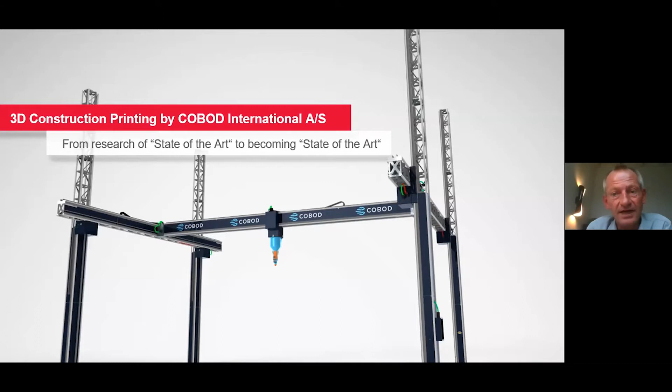Good afternoon, my name is Henrik Lund Nielsen. I am the general manager and founder of COBOD in Europe. As Ty was saying, COBOD stands for Construction Building on Demand. I'm labeling my presentation 'From Research of State-of-the-Art to Becoming State-of-the-Art,' because our start was in fact that we only did research, and right now, in all modesty, we believe that we ourselves have become state-of-the-art within 3D construction printing.

If we look at our development, we started with 3 years of research under a government grant, where together with NCC, the largest construction company, we were touring the whole world. This was a global investigation caused by the fact that the Danish government was afraid that we were falling behind as a nation within construction printing. Denmark is a little bit of a funny nation - if we are not number 1, 2, or 3 in some industry, we get nervous. So the government wanted to promote this technology, and tasked us together with this big construction company to tour the world.

We investigated all these projects, and brought home the best, brought home state-of-the-art, so to say. That took place over 3 years. During that process, we also did 2 test printers, tested 20 different recipes or materials for the printers, and visited 38 different projects. I don't think anybody in the world has ever visited that many 3D construction printing projects, and I personally visited 35 of them. So I think, in all modesty, I can say I have the broadest knowledge of what goes on in the world in this industry.

As a consequence, we had 2 conferences organized, and at that time they were the biggest, with 200 attendees just to hear about construction printing. We also issued the only report that's ever been written about construction printing - it's 108 pages. We've been asked for many copies, but sorry, it's only available in Danish, and the Danish government will not allow us to translate it, because this was information for the Danish construction sector, not for the world construction sector, so to say.

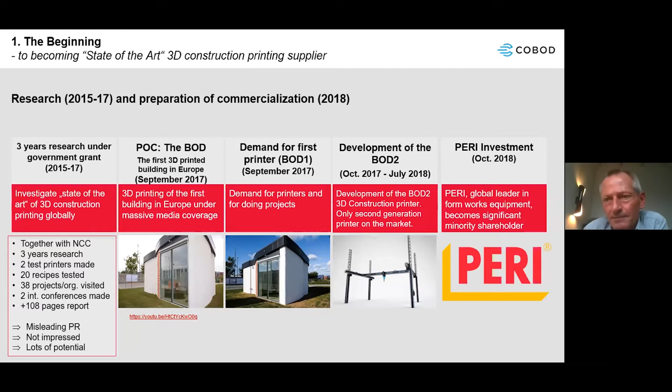So by October of 2018, they joined as a minority shareholder, and that, of course, was a huge quality stamp on our organization. So by January, we then delivered the first printer, and we delivered the next by April.

These are, in fact, 2 tenders, the only tenders that have ever been made in Europe, because in Europe, when public organizations are buying, they have to do a tender. And we won both of them.

Those were 2 educational/technical universities. Then by July, we made the biggest printer that has been made so far in the world. It is 27 meters long, 12 meters wide, and 10 meters tall.

With that, you can build printings or print buildings with a 300 square meter floor plan, as you can see down here on the lower picture, in 3 floors. So you can actually build a 900 square meter building. So forget thinking about this technology only as small buildings and so on.

In essence, we can do the building as big as you like. There's some limitations in the height and the width, but we can do them as long as you like. Let's have a look at how that printer looked like.

Notice the car down in the left-hand corner.

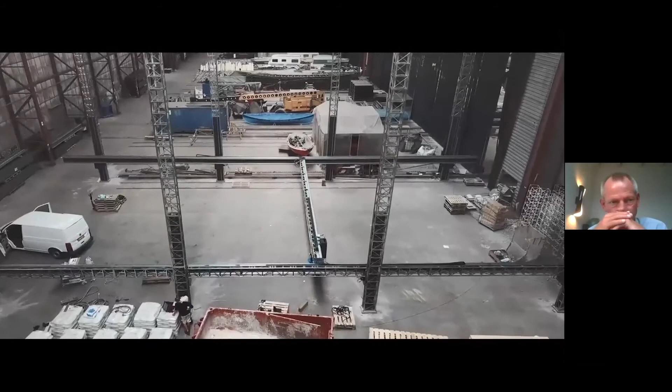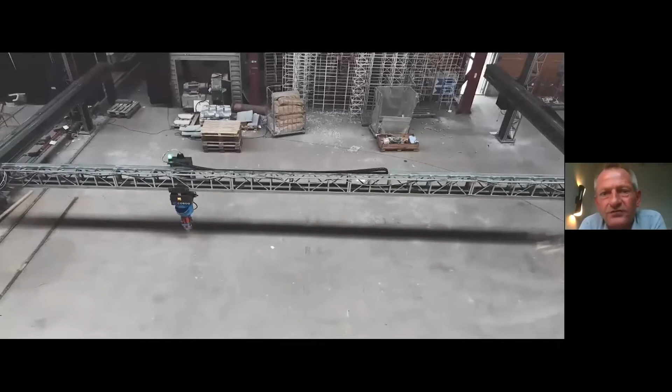So this is heavy-duty construction equipment. You are looking at hardware weighing 16 tons here. So it's not a flimsy little toy thing. This is heavy-duty construction machinery.

That was sold to Saudi Arabia. And then by August, we then won this iconic project by Emaar. Emaar is the Sheikh's real estate company in Dubai.

As you might know, the Sheikh has decided that 25% of all buildings in Dubai in 10 years from now will have to be 3D printed. So it's a hugely interesting market. And we won this project about building this villa, which is quite iconic, as you can see, very special design, very prestigious project. We have actually done it, but they are not making it public yet because of Corona.

Then with the help of PERI, we began distributing our printers in Germany, Austria, and Switzerland. And PERI is supporting us with 150 sales guys in that market.

Now I have a problem because I can't see what the next slide is saying because you guys are in the way with your, how do I move you guys away over on the right-hand side? Oh, like this, okay.

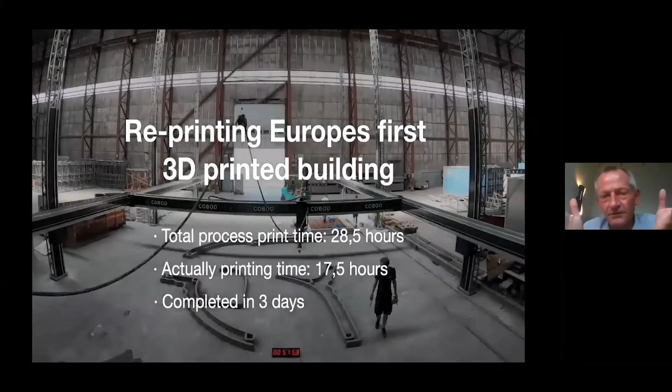And typically for us also, everything is on camera, everything is on time lapse, so you can see everything we do. You can also see when we mess up, sorry my language, because again, you can't expect to be perfect the second time. You can expect to be better, but not perfect.

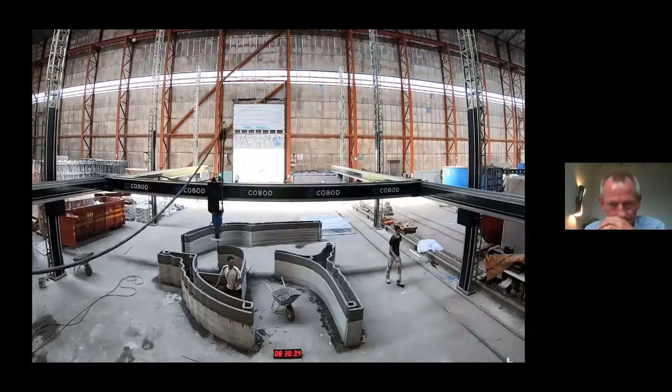And you can see there's a timer on the bottom, so you can follow how far we are coming up at what time.

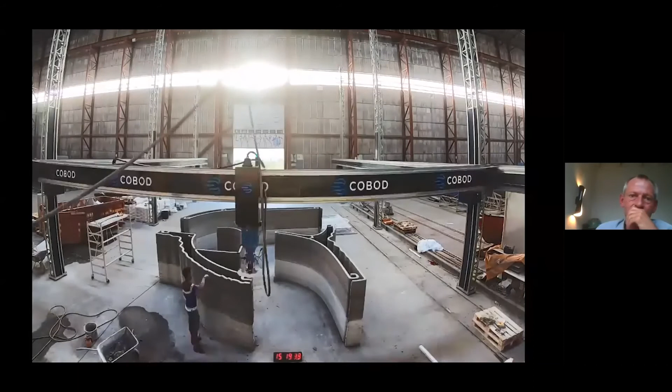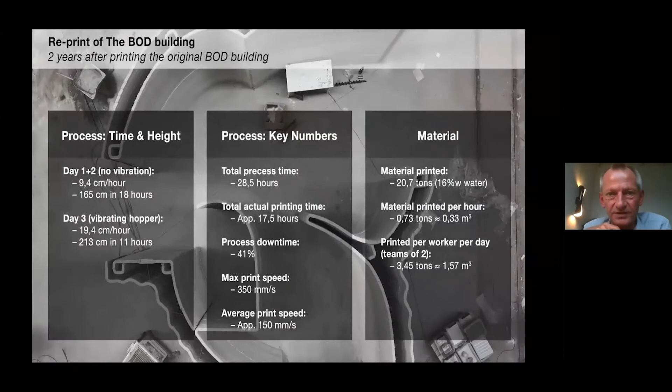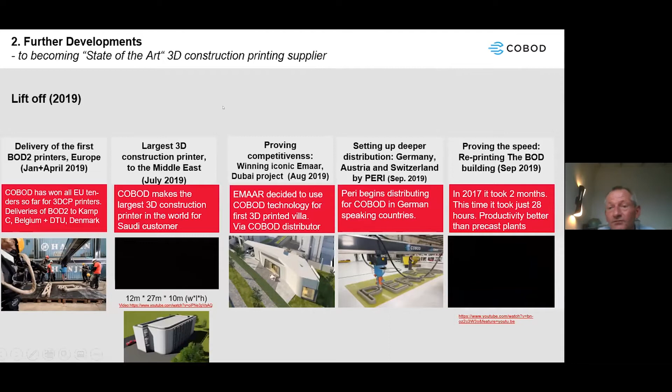And again, full documentation is supplied. We had various issues also when we did that. It didn't run perfect, but we came down to 28 hours. So we went from 2 months down to 28 hours. That's like a 30 times improvement in productivity just by doing it the second time.

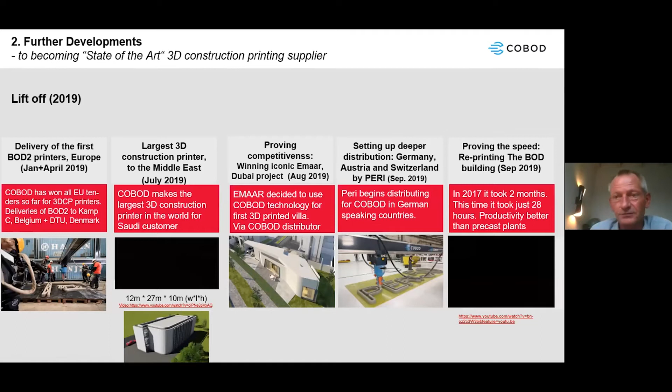So now what would happen if we did it a third time or fourth time? Because we're not a construction company, we are a robotics company. But you can imagine yourself the productivity increases that happen as you gain more and more experience. So if we had to do it today, we would expect that we could do it in 8 to 10 hours.

Then by October, we entered into a long-term cooperation with General Electric and Lafarge. I don't think, at least General Electric, they don't need further introduction other than to say that they're very, very large within windmills. And Lafarge is the world's biggest cement maker.

So these are companies with 200,000 and 100,000 employees, and then our small little company, but we just happen to have the technology that the other guys need in order to make very tall windmills. So this is the idea of that project, that we should make on-site print very tall towers.

And we started printing the first 10-meter windmill tower last year. And we will see a video of that now.

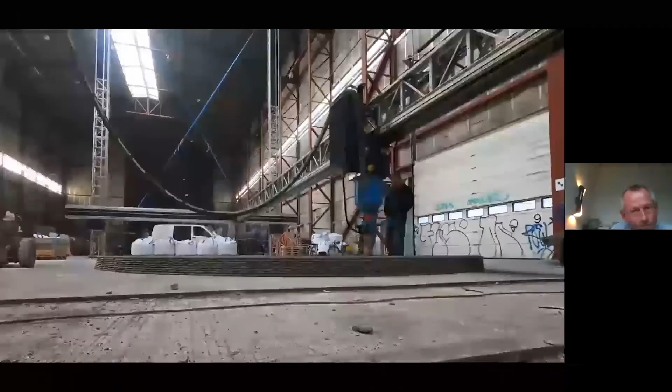Notice what happened when we come up in the height. You don't see any people at all. You just see the printer working. So where are the guys? You know, there are no guys around. Oh, sorry.

This is a long-term cooperation, so we are continuing doing lots of stuff with General Electric and Lafarge. And this customer, the educational institution in Belgium that we supplied a printer to, actually used it in November, but they first published it now, to print a 2-story building, the first 2-story building in Europe.

Let's see how that looks.

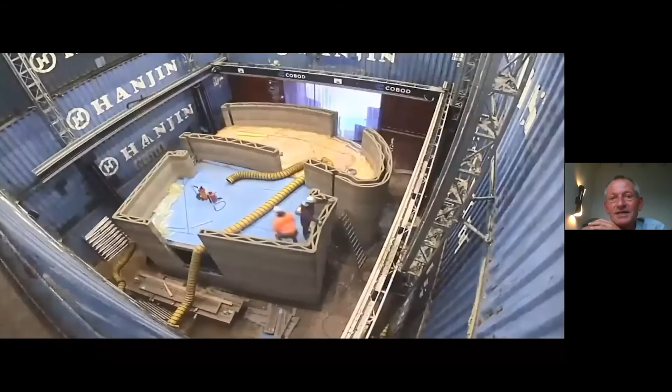This video has been downloaded 350,000 times, a testament to the extreme popularity that the technology has right now. They did one good thing: they left the printer even after they finished the building, so everybody could see that it was done on site.

Very nice trick. Then by December, we had a visitor from Japan, and they were talking about a project they hadn't mentioned before in our previous discussion. So we said, you seem to have a project, do you have some drawings? And they said, yeah, we have drawings. So I said, can you send them to us during the meeting, right? So they sent it during the meeting.

3.5 hours after, we were standing in the warehouse looking at the first meter of their building, as you can see on these pictures here. You can also notice the huge improvement in the smoothness of the wall quality that we have made. That just shows you the extreme fast conversion from digital files to physical product that is possible with this technology.

Then we started selling in the US, and we've had the first 2 printers shipped out to the US, respectively to Florida and Texas. Very well chosen—when you look at where COVID is hurting the US, it's exactly those 2 states it's worst. So we haven't been able to go there ourselves yet, but the printers are there.

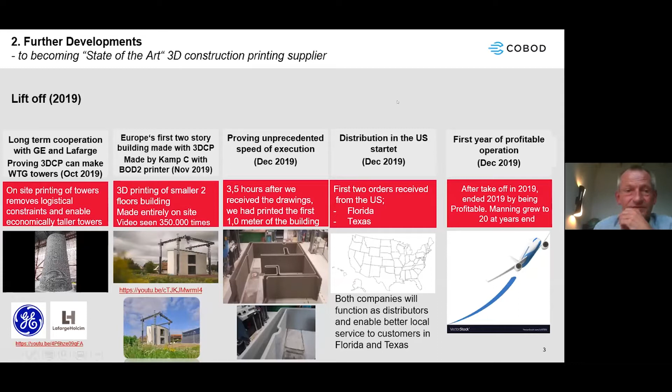And very unusual for a startup, we actually turned profitable already in the 2nd year of our operation, in 2019, which is quite an undertaking.

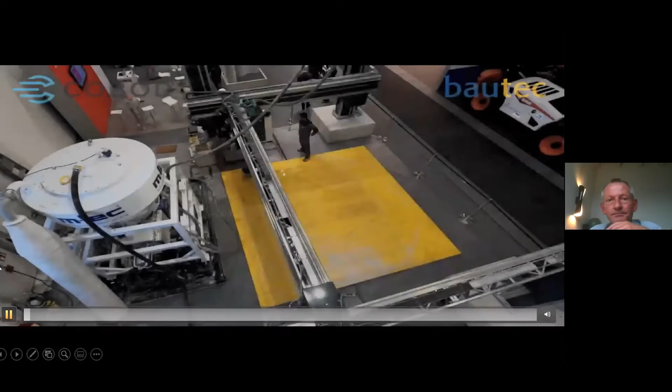Again, to prove more how much we had improved, we showed up at an exhibition live, and we said we're going to print a small house every day in Germany. And so we did that. It's a very small house, but it still proves a point.

Notice how many visitors are there looking all the time. So there's no fake here, there's no fake video editing. People are seeing live what we're doing.

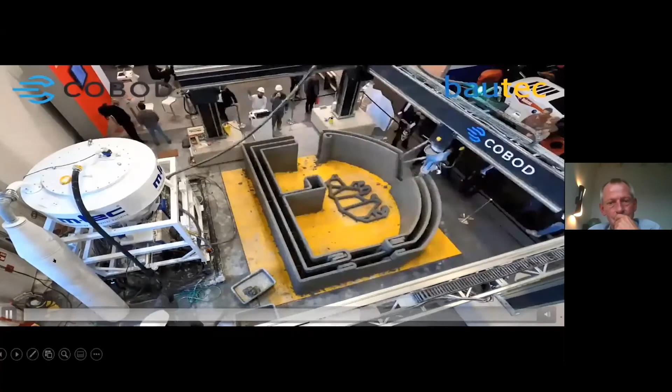This is the logo of the exhibition that we are printing in the middle. They wanted to have that logo in concrete, so we printed that for them.

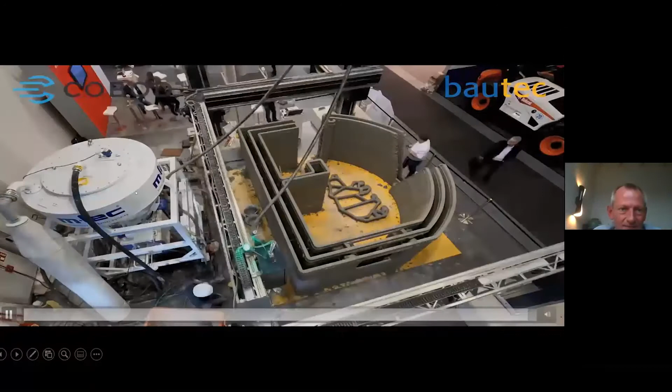But more interesting maybe is a more detailed shot, because these time lapses don't show that many details, but we can see some details here.

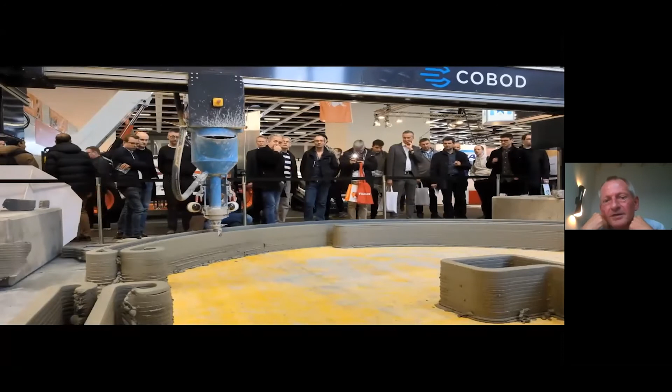Again, you notice when we use the flaps, the walls become very, very straight and smooth. We can't use the flaps on the lowest layers, but we can use them as soon as we come up in the height.

This is again very much different than our competitors because this is real life. You can't hide anything.

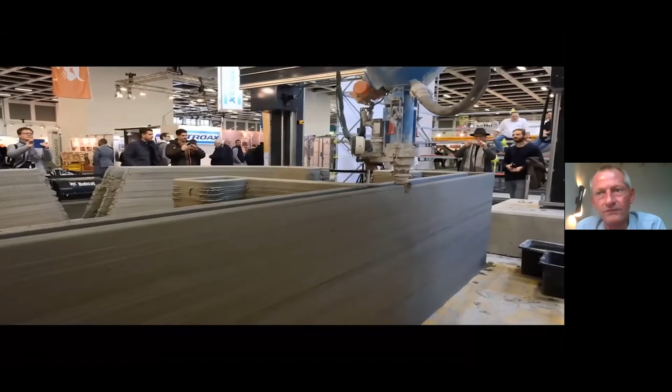So we were obviously the talk of the show because nobody had done this before, printing 3.5 houses in 4 days. Then we actually also started selling printers to Africa, which was new to us.

And we've also now started selling into precast plants, which is new to us. Normally we have been focused on on-site application, but now we've actually sold into the first precast plant. And in total this year, we are growing 75%, which, if you think about Corona and so on, is not bad.

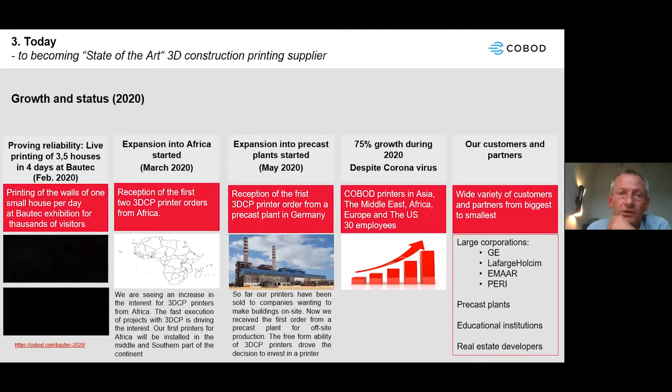Today our customers count 4 different groups: large corporations like we heard—GE, LafargeHolcim, EMAAR, PERI, these are big companies; the precast plants, as I spoke about; educational institutions; and then real estate developers. We have a big amount of real estate developers that want to move into this technology and sort of shortcut some of the construction companies.

Just a few words about our printer. It's modular, so you can build it in any direction that you like with these modules of 2.5 meters, meaning you can do the size that you want. There are some limitations: it's 10 meters in height right now and 15 meters in width, but in the length you can go as long as you like.

So we can just see a few more details about the printer here.

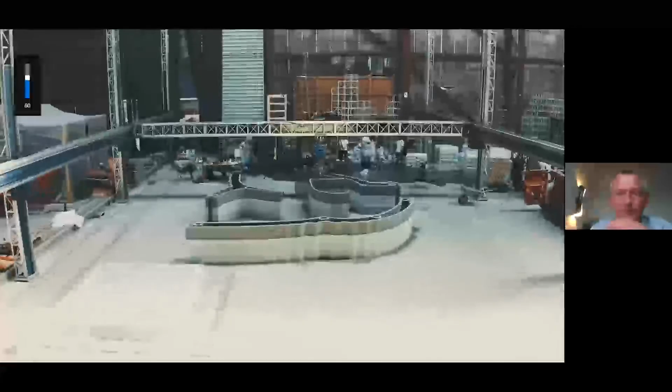I think I still have 3 minutes, right?

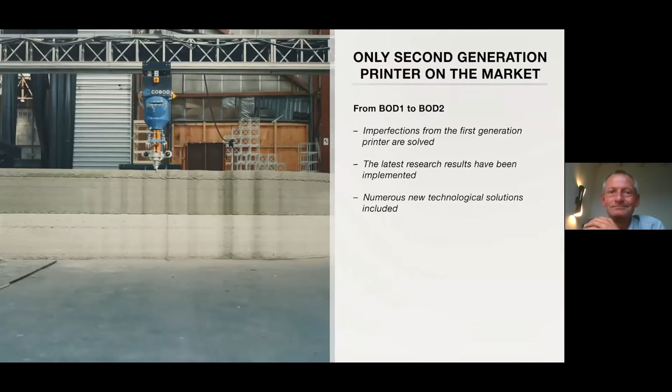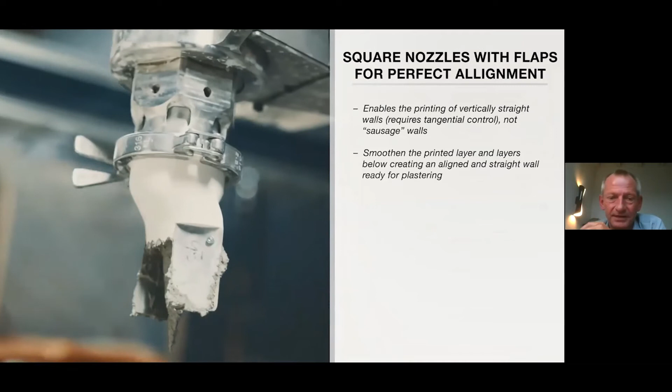As you can see, it's extremely fast. The printer goes up to 1 meter per second, which equates to almost 10 tons per hour. And as a comparison, the first building we did had 20 tons of material. So that means if we put it to full speed and could utilize that, we could print the house in 2 hours.

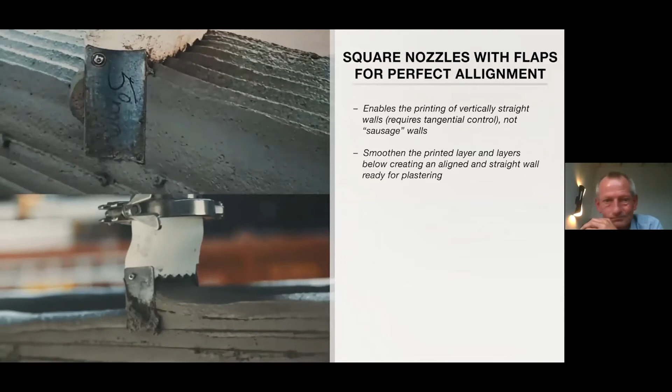This is showing how easy it is to change nozzles. So if you want to change the width or the height of the print, you just put on another 3D printed nozzle in 2 minutes and you're ready to go.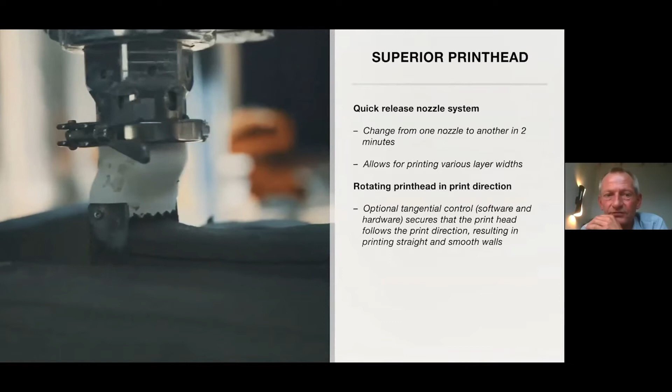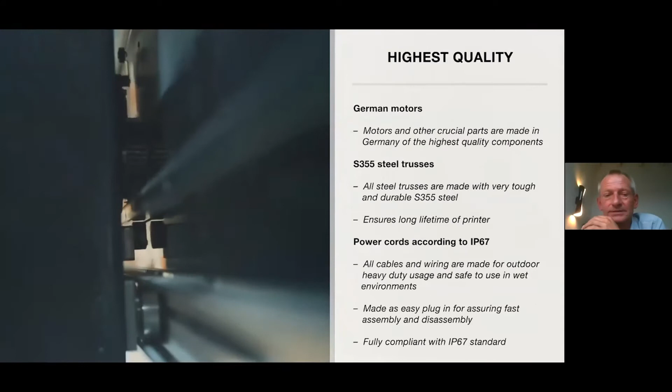And of course, our printers come with our own software. It comes with cameras so that you can actually see what is going on. When you're up there, 10 meters up there, you can actually see on the screen what is going on with live cameras installed on the printhead.

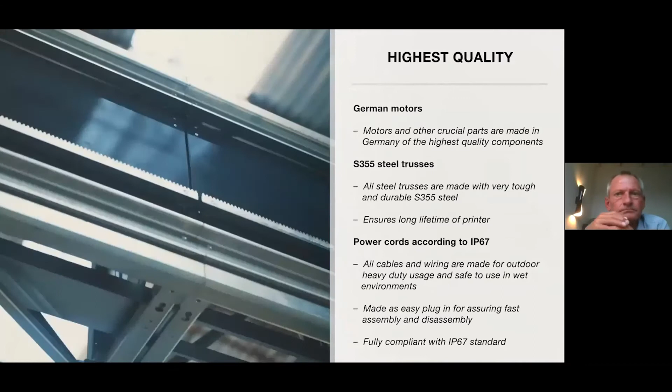You can also see the parts. It's like I'm saying, this is a Mercedes 500. This is not a toy.

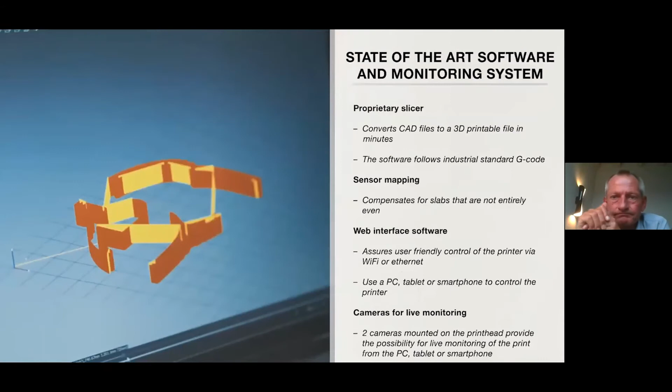It's IP67, so it's safe to operate outside also, even if it rains, etc. That's not a problem.

You see the cameras there mounted on the printer so that on the laptop you can follow how the print is going.

And it's of course EU certified with the safety mark.

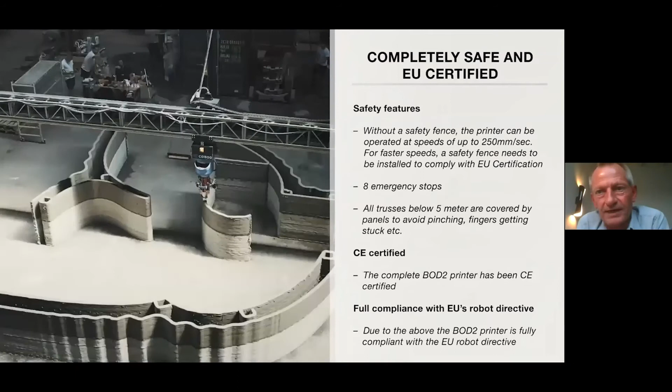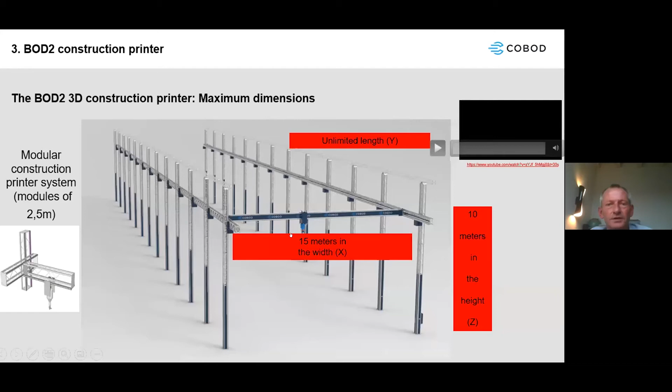So my last slide is just about the advantages that you're getting with this printer, which basically are 12 unique advantages. You can get the size you want. It's safe and EU certified. It has this fantastic speed of 1 meter per second, and you only need 2 operators to operate it.

You're free to choose any concrete or mortar material you want to print with. We don't force you to print with any particular material. It has this very, very high quality, as I said, and it has this ability to have flaps and tangential control where you move the print head in the print direction to allow for printing very smooth walls.

You can easily change the width or the height just by changing the nozzle. And you can either feed in material through a pump if you're doing an industrial job, or you can feed it in directly at the print head if you're testing something.

And it comes with this state-of-the-art software, and it has a probe, a sensor. So even if you have an uneven surface, the printer will compensate for it so that you will still print straight, even if you start on an uneven surface.

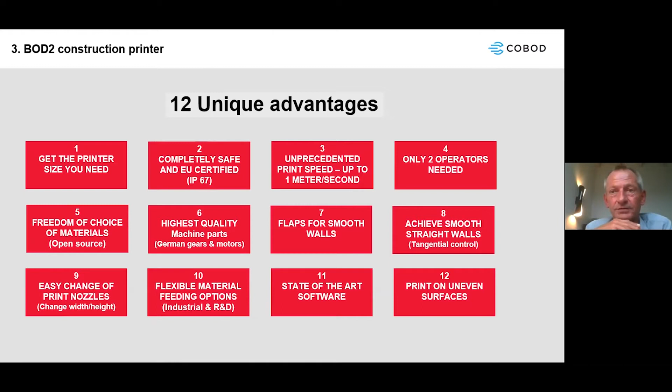And by that, I conclude my presentation.

Thank you, Henrik. Amazing stuff. Well, design of robotic construction printers and automatic processes. I'm really quite excited. I have a few questions in mind, but I think we'll leave the questions. Please feel free, everybody feel free to ask as many questions as you like. I'm here all morning if you like. Yeah, I have some burning questions, but I think we leave the questions at the end of the session. Maybe we hand over to Vijay to start the second presentation.

Vijay? Hi, yep. So let me share my screen. Can you see my screen well? Yes, we can. Okay. Hi, yes.

Yep. Hi, everyone. My name is Vijay. I'm super excited to share some of our key technologies, representing here as an Autodesk research guy, sharing some key technologies in future making in construction. I'm part of a research team under the CTO's organization, based in Singapore, with more than 600 employees in Singapore and over 300 research engineers developing various solutions and software for our future customers. In total, we have more than 11,000 employees worldwide and 18 million active users.

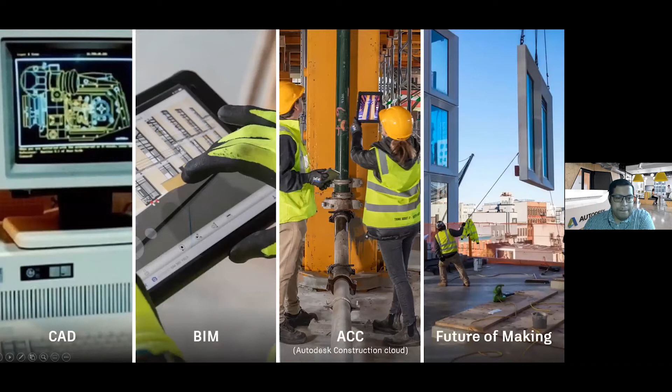38 years ago, we started with just one product called AutoCAD and began creating software tools to help people with design challenges every day. We have been innovative ever since. In the early 2000s, we introduced 3D modeling and BIM-based design. Today, we are developing tools for cloud-based BIM processes, which we call Autodesk Construction Cloud. Our ACC customers use these tools to collaborate better and visualize and manage their data from the office to the field. And we are thinking about tomorrow by researching and developing the disruptive technologies and processes that will change the landscape of the future.

So what will it take to build something better? What is technology's key role? In order to adapt new technologies, we have to think of three things.

If you want to do something, you need something to build first, or you need to have smart things, or you need a process of making, or you need a changing way to work. I'm going to talk more on the making side.

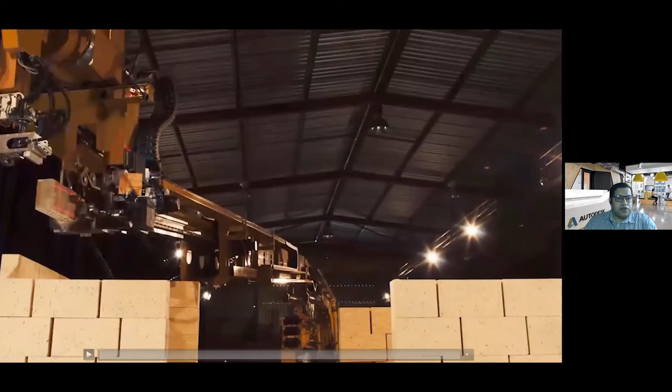When we talk about the process of making, how could it be different? We're talking about using ideas and practice from another Autodesk-supported industry. A growing population will require the construction industry to do more with less waste by adopting robotic automation. Components for construction should be designed for automation—autonomous vehicles, additive manufacturing, and other types of robotics and automation are beginning to impact construction sites.

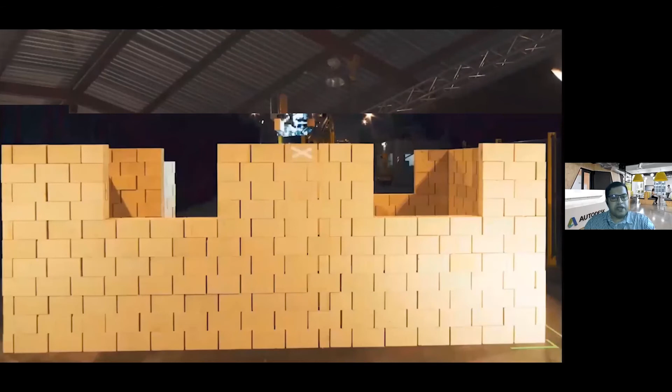This is an example, Fast Brick Robotics from Australia. They lay real bricks. In order to do that, they have to know the building information and do geolocation with the actual CAD model as well as the robot itself. So they use the Autodesk Forge platform to create automated applications and processes by connecting various software within Autodesk.

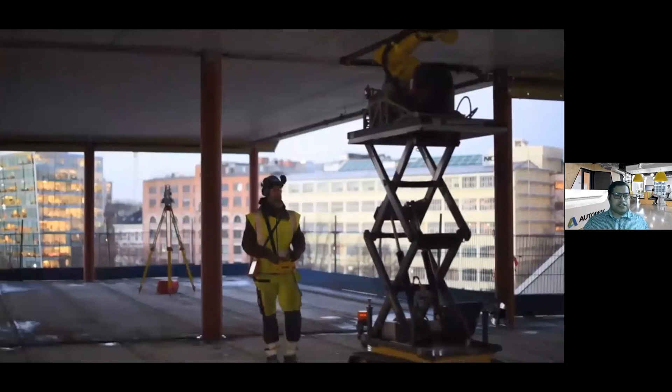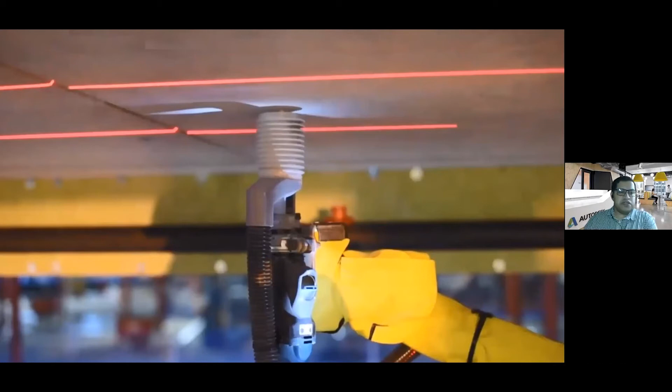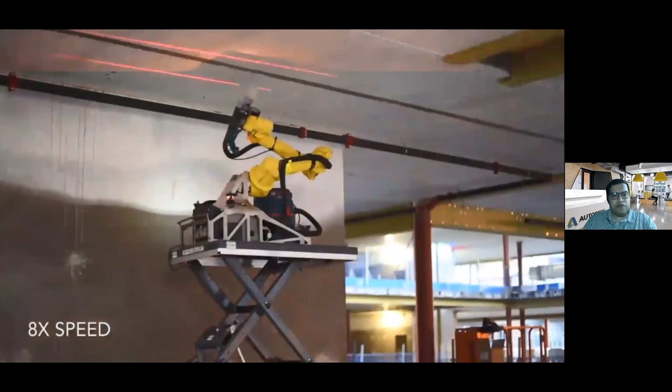This is another example, a company called Skanska, a robotic drilling company used in construction. They use Norway's nLink robotic drilling machine on this project. They claim it's the first mobile robotic drilling machine, and it's eight times faster than manual work. The robot is geolocated again and connected with the building information model. The BIM guides the robot so it can drill holes for installation of MEP systems with millimeter accuracy. They use BIM, BIM 360, and the Forge platform to feed data to the robot to place the laser marker and automate the drilling operations.

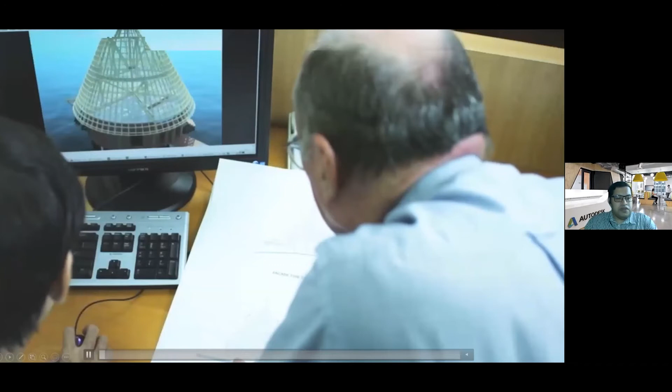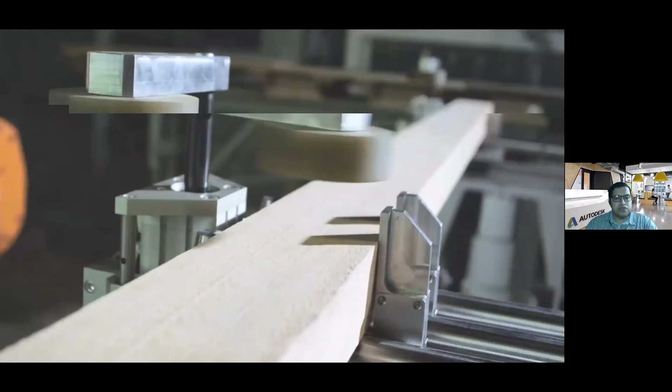This is a company in Singapore, a woodworking company. They use manufacturing tools and technologies to replace their highly skilled carpenters, using a robotic arm to build resorts around this region. They use Autodesk PowerMill manufacturing software to generate offline cutting paths to run their ABB industrial arm to cut size. Autodesk helped them automate the entire robotic programming process to eliminate mistakes and increase productivity. Using our support, the company invented a new type of reinforced, fire-retardant, sustainable wood, which they branded as One Wood.

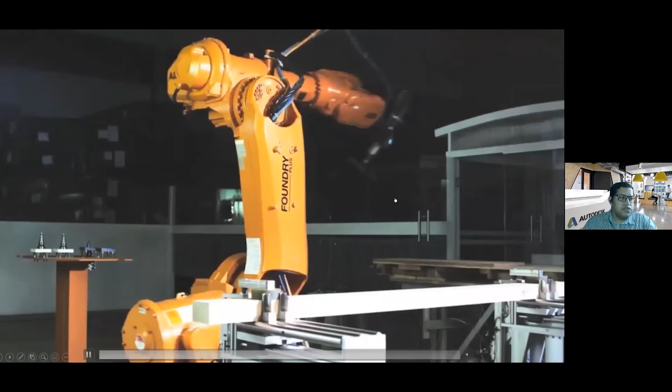You can see all this robotics—we can do tool changes, changing the tools according to the feature or shape of the wood.

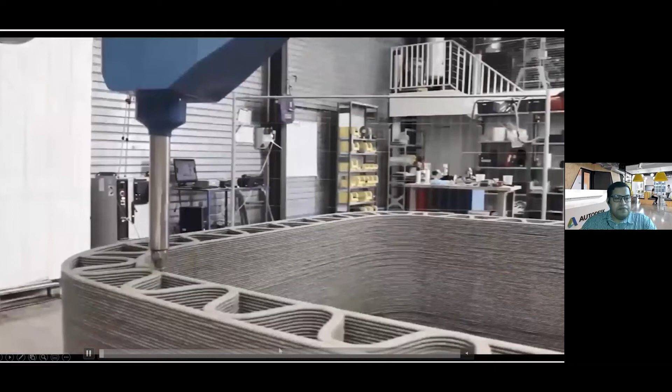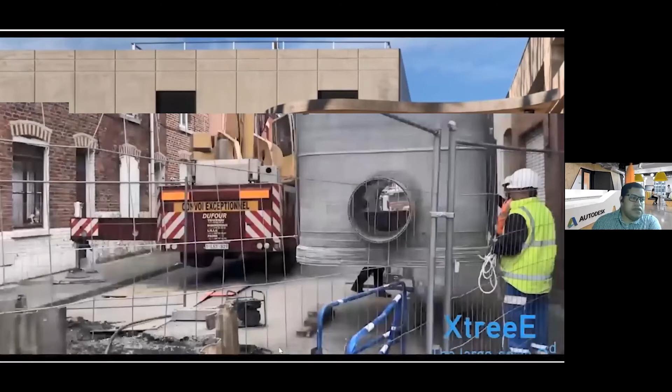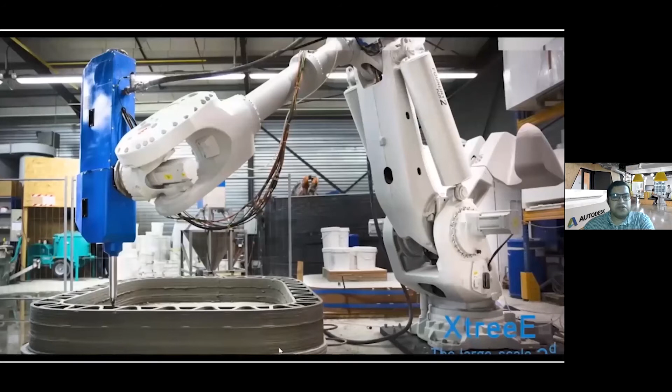This idea is again from the manufacturing industry, done with additive manufacturing—we call it 3D printing. There's a lot of potential for 3D printing to reduce waste in the AEC industry by allowing firms to only produce what they need. Autodesk worked with a firm called XtreeE to streamline the process of 3D printing with information from BIM models. You can see it printing a drainage pit. 3D printing allowed them to save costs by avoiding the expensive formwork of the concrete, removing and eliminating waste from the process.

We gave our AEC-side expertise to design the pit, providing software solutions as well as manufacturing solutions to slice it, run it through robotic simulation, and print it.

This is another idea demonstrating a 3D printed expansion formwork. They pour concrete into the expansion form mold to demonstrate the printing capabilities. This was done in France in collaboration with a university.

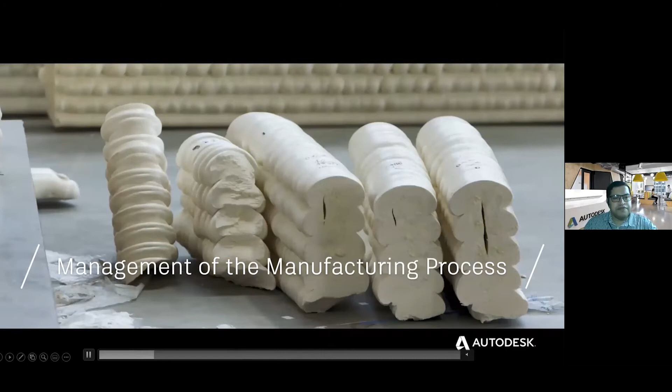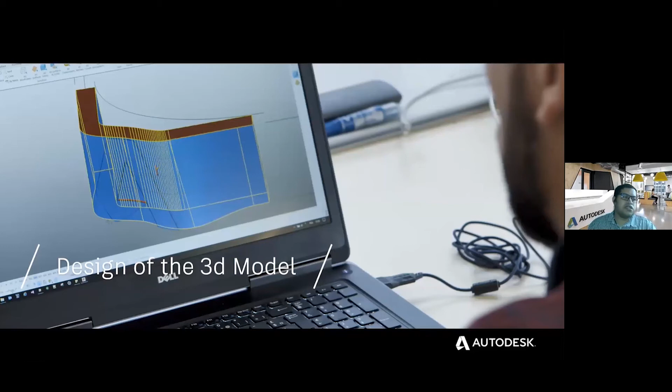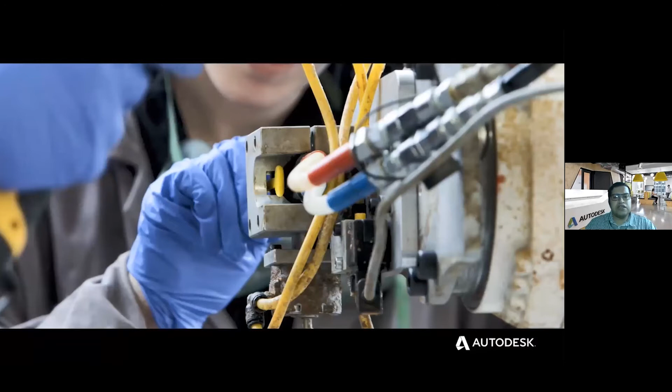We started designing from the nozzle itself, using our safety simulation analysis tool to design a good nozzle. Then we brought that design into our manufacturing solutions to generate the slice and path. We controlled the robot path and speed so that the form is fully expanded when the next layer is printed on top of it, making sure everything is cured or expanded properly before the next layer is reached. We also have digital twin capabilities.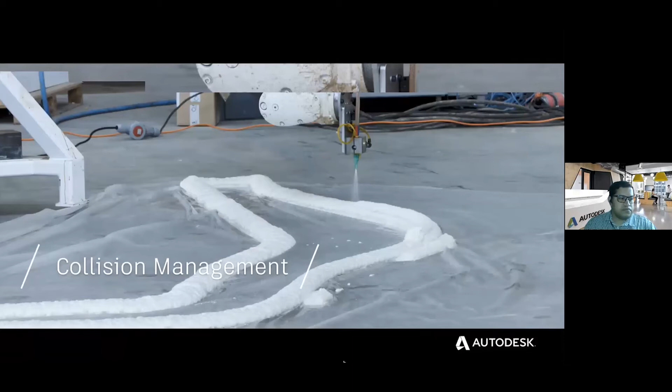So you can add reinforcement or whatever within the extrusion, within the mold itself.

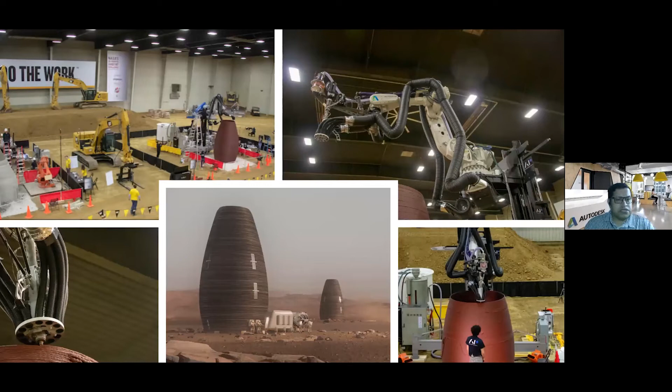Another idea is sustainable housing habitat in deep space using additive manufacturing for NASA. This was a competition, and we worked with AI Space Factory on this project. It was an attractive endeavor because the construction technology developed for use on the moon and Mars could provide valuable benefits here on Earth, like low-cost housing solutions using recyclable or locally sourced material. In this project, we had to work with the material aspects as well, 3D printing technology, and the characterization of the materials.

I'm showing this video. Roger, go for deploy.

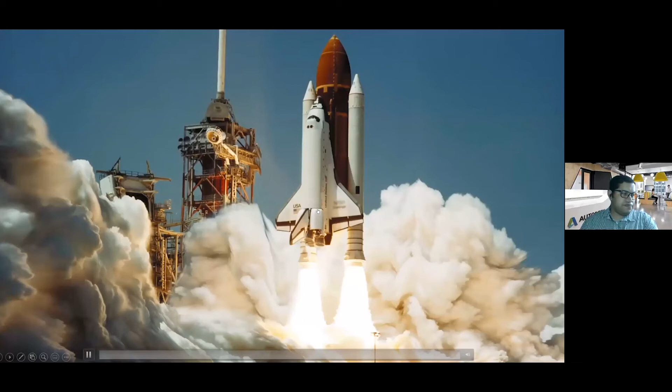The idea of colonizing another world has always been a fantasy of ours. It is in our nature to pioneer new lands, to settle and inhabit even the most unforgiving environments. If NASA's astronauts are to have a long-term presence on the moon or on Mars, they'll need to figure out ways to build habitable structures, something that will protect them from the extreme temperatures, radiation, and micrometeorites.

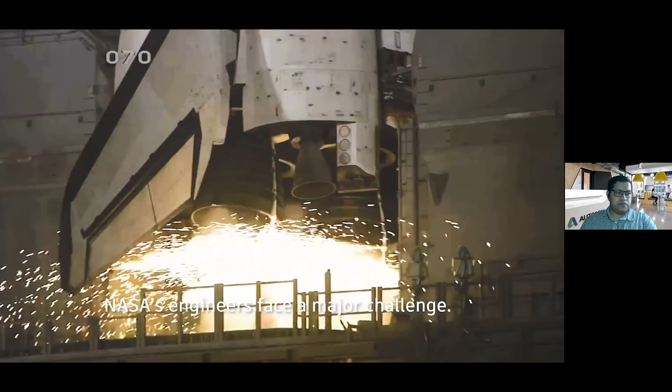NASA's engineers face a major challenge. Shipping large quantities of cement or other heavy building materials aboard a rocket just isn't practical or cost-effective. Engineers at NASA's Swamp Works are developing a solution: 3D printing habitats on other planets using natural resources found on-site.

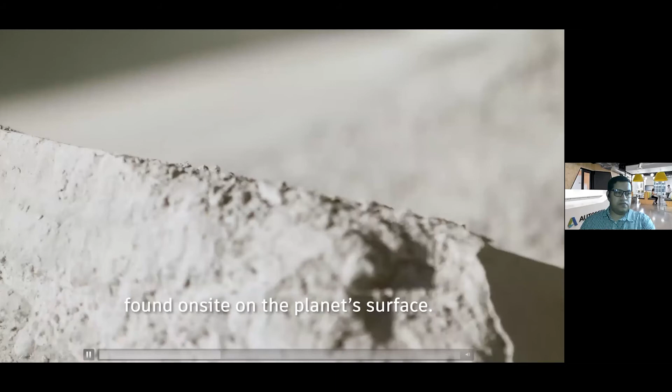On the planet's surface, along the way, we discovered what they are doing, and then we realized how this could be utilized for industrial construction, how we can build sustainable structures. Using new additive manufacturing technology, combined with the latest advancements in material science, structures can be sustainably built using a combination of local materials and lightweight recycled materials. By mixing small amounts of plastic waste with lunar or Martian regolith, similar to dirt and rock found in desert climates on Earth, a cement-like structure is formed and deposited into place with robotic precision.

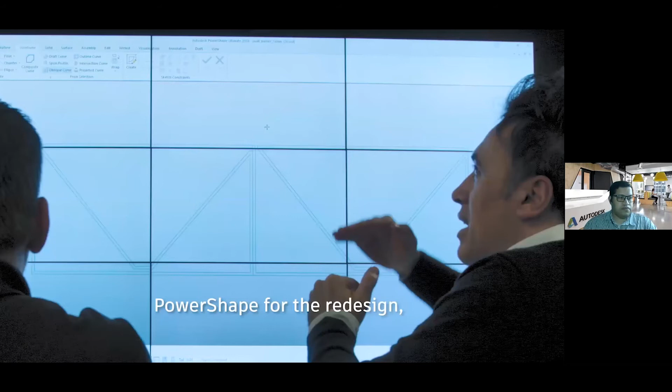We are using Fusion 360 for the design, PowerShape for the redesign, and PowerMill for the toolpath generation. The technology that we're seeing today is incredibly valuable because it's using automation in order to produce that. So that means that I can repeat the process in even the most remote area of this planet.

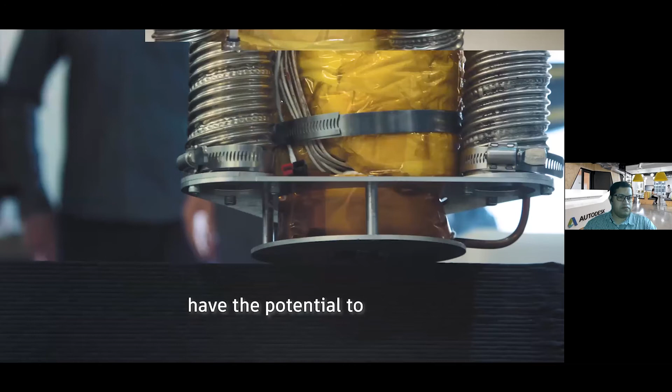The materials and techniques being developed on this project have the potential to revolutionize the way we do construction here on Earth, too. Plastic pollution could be recycled into sustainable 3D printed streets, sidewalks, playgrounds, even habitable structures.

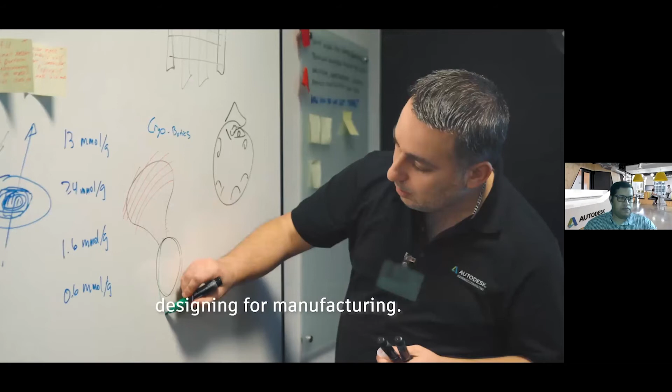This is really the future of making things, is how we reimagine designing for manufacturing. So now we need to rethink how we design and manufacture parts by joining these two skills in one. We have the opportunity to advance them together in order to reach new frontiers, either to impact life here, or as well life on the moon and Mars.

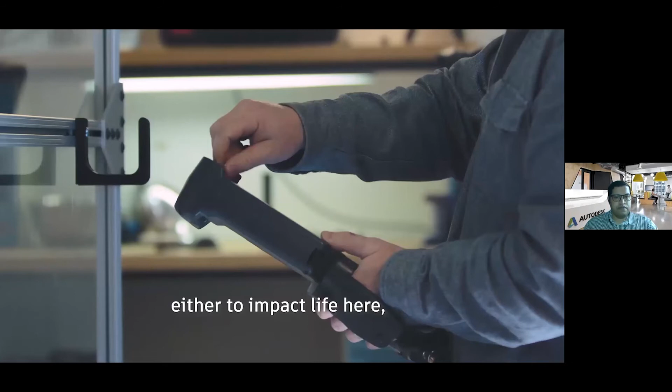Ignition sequence start. 3, 2. Yep, with that, yep, that's it. Thank you so much.

All right, thanks, Vijay, for the presentation. Okay, so maybe we just start with the questions from the audience. Let's invite Hendrik back. Hendrik is here. I'm here. We will just have a kind of informal discussion. We have some pressing questions from the audience. Maybe I can just start, right?

Well, Alvin Key would like to pose a question to Hendrik. He said, as seen in your presentation, 3D printing has already been used to create architecture, but always in a very small scale. Do you foresee this technology being feasible to be brought for on-site fabrication, printing of smaller houses, as the printing system and the technology now is modular? If you foresee this in the near future, how do you overcome difficulties such as unpredictable factors like weather, seismic calculation and condition caused by the environment? Yeah, this is from Alvin.